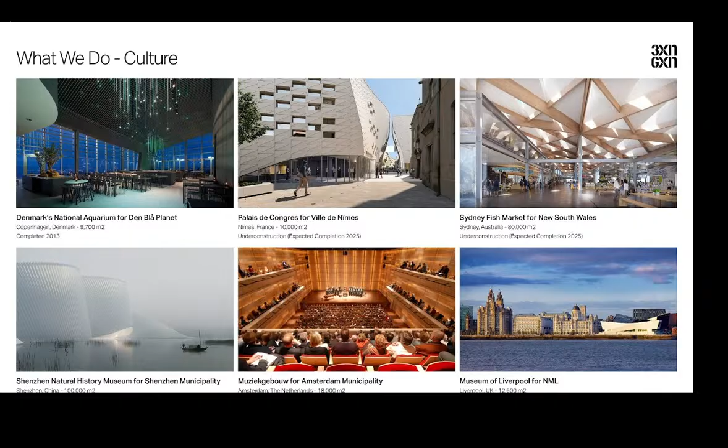We also do more complex work, like children's hospitals, and sports facilities. Is this still muted? Should I go? You're gonna have to, yeah.

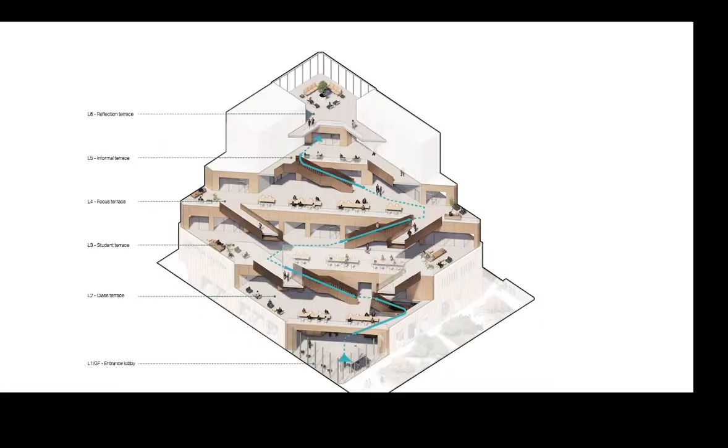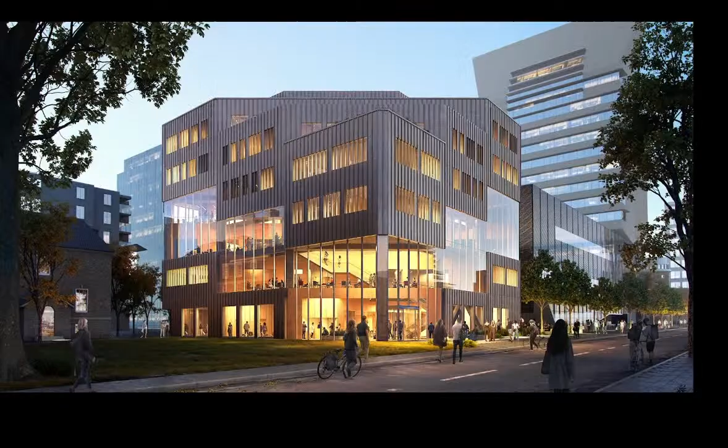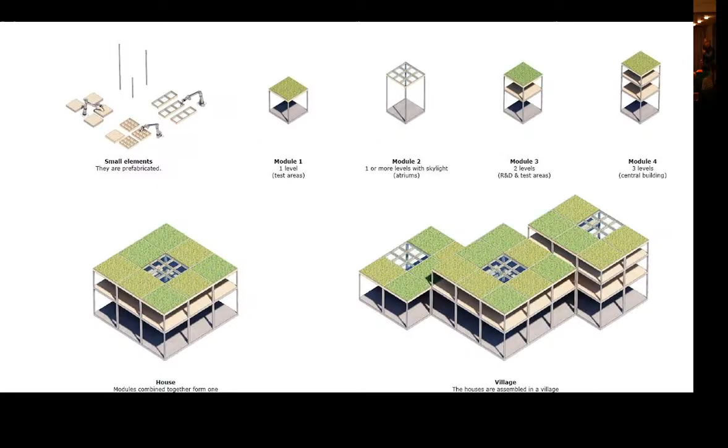The wooden facade gives a very dynamic expression, shaped around a central courtyard, with three light interior atrium spaces. This is a factory and research facility for two robot companies.

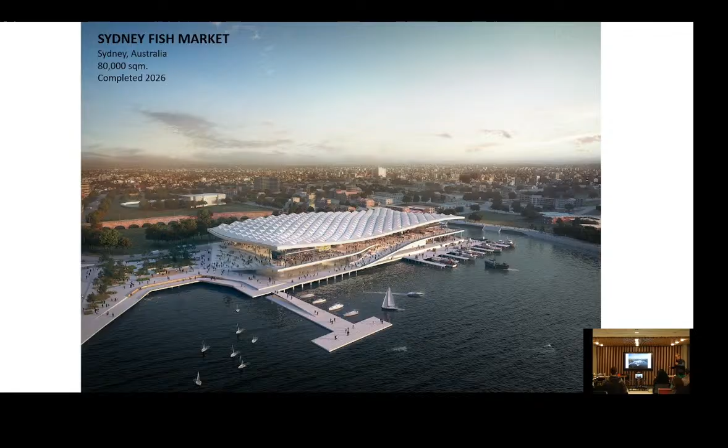More recently, we opened the Sydney Fish Market, with a giant 40,000 square meter roof. This was the rendering from the competition, and this is the final image—I think we got it almost right.

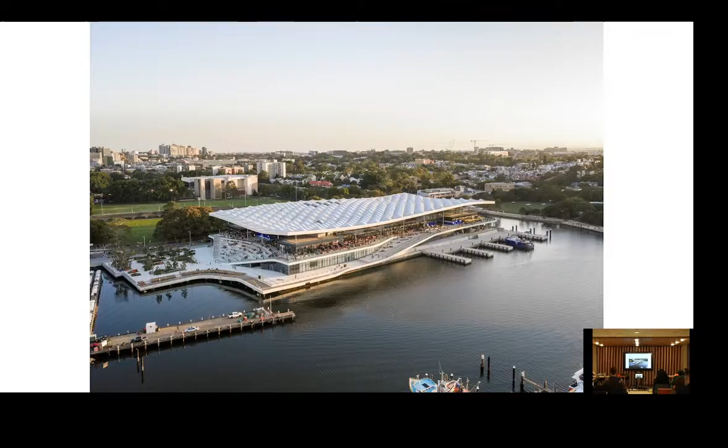It's a large fish market in the Bay of Sydney, consisting of two levels. The whole production, landing, and auction of fish happens on the ground floor, while the first floor is filled with restaurants and kiosks, making it a very public space to visit and enjoy.

Some images show these very public terraces forming a landscape underneath the wooden roof, which sits on steel columns. This is the facade to the street, and the facade towards the water.

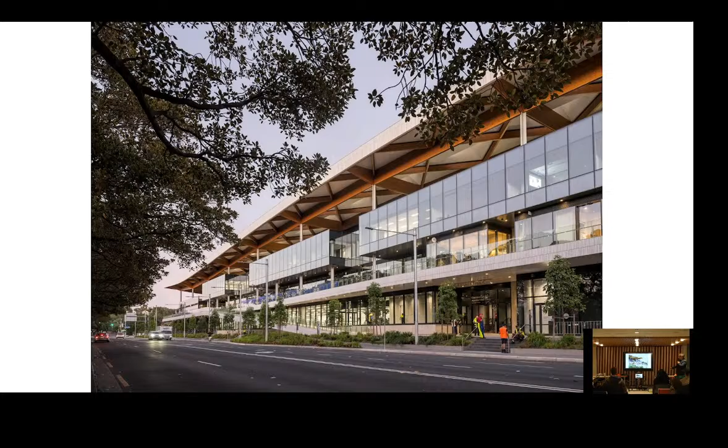The entire roof is a timber structure clad with aluminum panels and white solar panels, PVs on the roof, along with skylights that mediate daylight into the space.

These are views from underneath towards the harbour. You can see the roof consisting of sections shipped to the site and raised up—each has one side with PVs facing the sun, one side with roofing, and one side with a skylight.

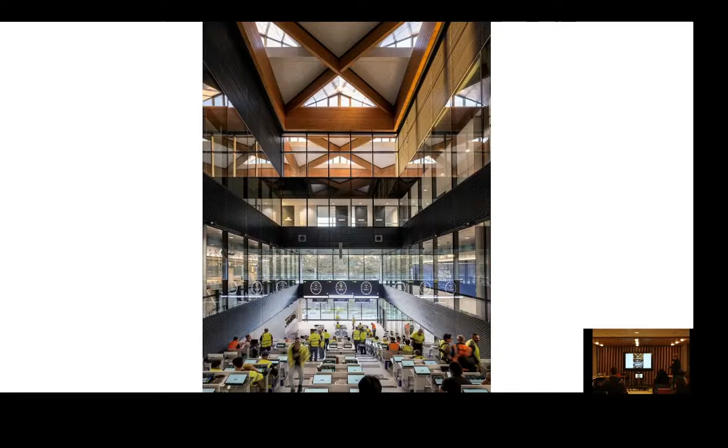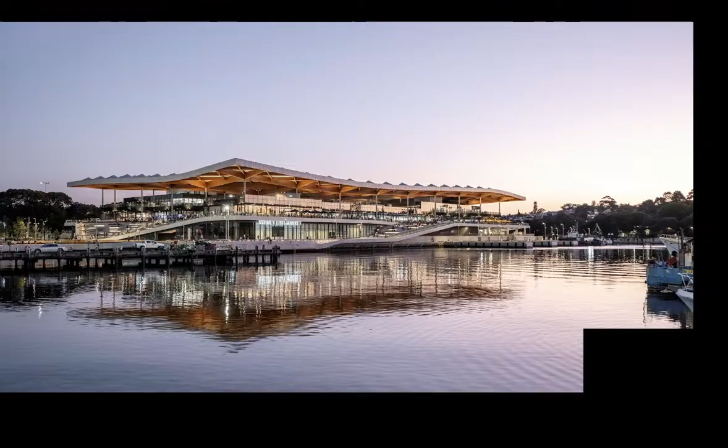Here you see spaces that puncture through the public space—this is an auction hall on the ground floor where fish are landed and auctioned every morning, and most of the ground floor is a very industrial space. Here are a couple of views from there.

It was opened earlier this year, in the beginning of January.

What we're increasingly looking into is how we can use even fewer resources when we build in Europe—this is becoming a real issue in both legislation and elsewhere. Currently, about half of our projects are transformation projects where we use existing buildings as the base.

We kind of live in a building that has been transformed ourselves. This is our office in Copenhagen. It used to be an old shed for repairing boats. We rebuilt that about 10 years ago, and yeah, this is how it looks like.

So obviously the challenge here is that if we keep using material, it's not an infinite resource. The construction sector accounts for about half of the global resource use, and we tend to throw it away when we break buildings apart.

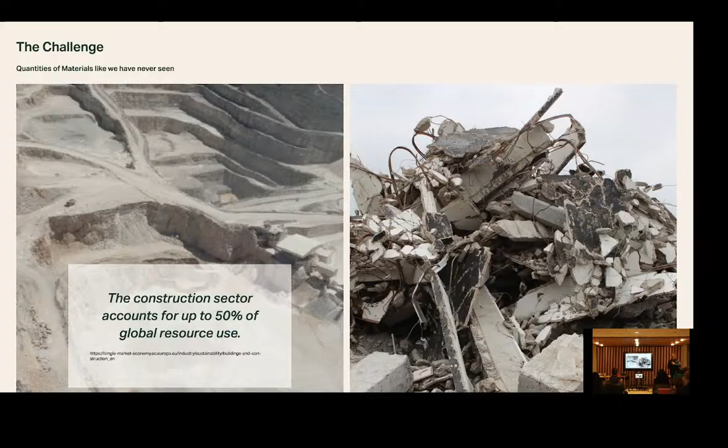All of these numbers obviously need to be taken with a grain of salt, but there are studies that say we approximately have 240 billion square meters of construction in the world today, and prescribed necessary new construction until 2050 is 420 billion square meters, equivalent to adding another Manhattan to the world every month. That's fast.

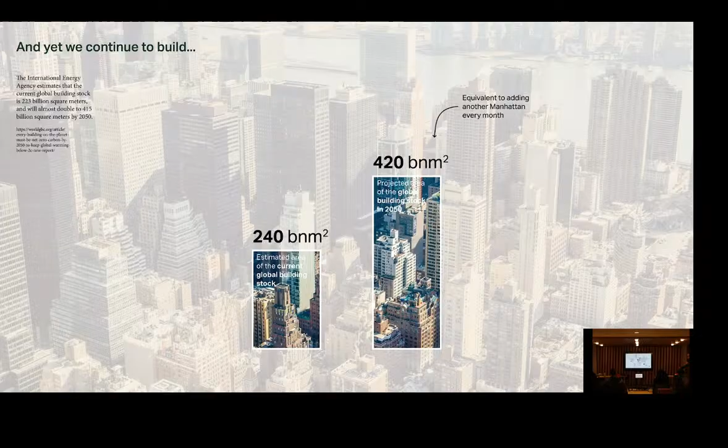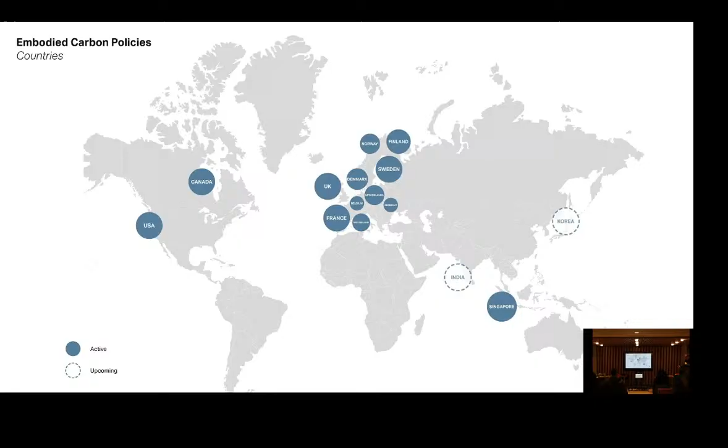So to cope with this, a lot of governments and cities are starting to introduce carbon budgets in legislation. This is a study of a lot of European carbon budgets - Canadian and American also already have carbon budgets. The problem is we're not really comparing apples with pears, so every country is making their own budgets and their own legislation at the moment.

Also, public opinion is valid in this. This is a case from London, where a building was slated for demolition - the Marks and Spencer building. They went through planning, got permission, and got all the way up to basically the demolition company arriving at the building, and then it was rejected by the city. Because of public opinion, it had to go - it had to be transformed and kept.

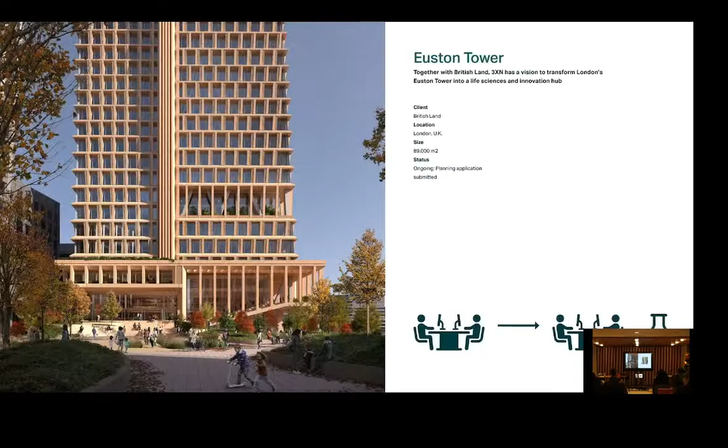So obviously this was a major setback for the developer, and it has really influenced providing these lab-enabled office spaces. Obviously, the facade on a building like this needs to be replaced, so we're keeping the concrete structure.

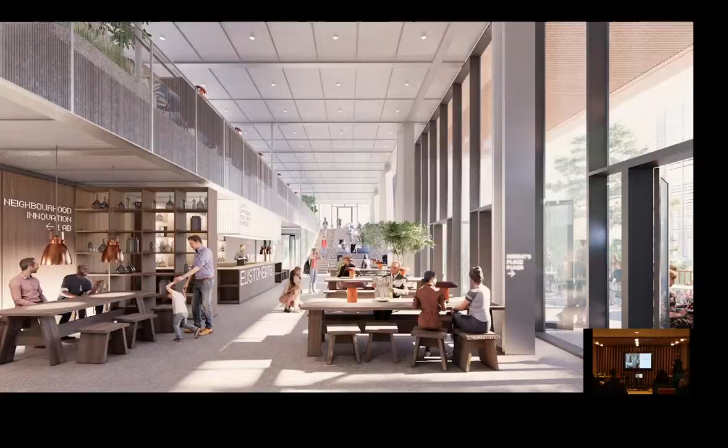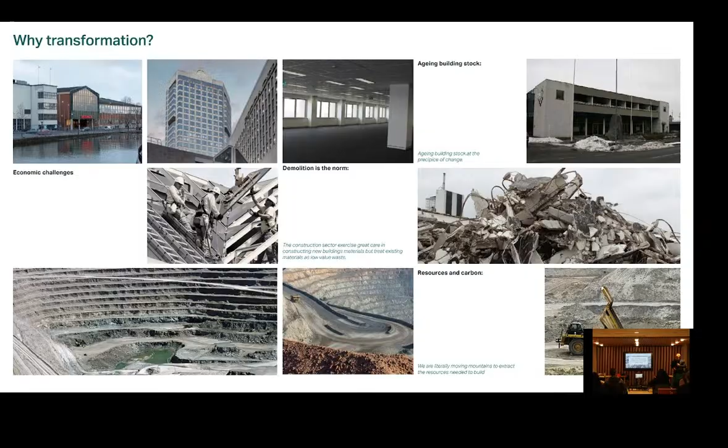Yeah, okay, so basically since the times of COVID, there has been a flight towards quality in office buildings. It's no longer considered appropriate just to have an office space. We see that a lot of office spaces are vacant.

And at the same time, we have an aging building stock. This is the comparison between the US and Denmark. Our buildings last for a little bit more than 60 years on average, and that's not a lot. If you see it in a historical context, from the 1900s, we see that buildings were built to last 200 to 300 years, and this is gradually decreasing until now, where housing structures are built to last about 50 years.

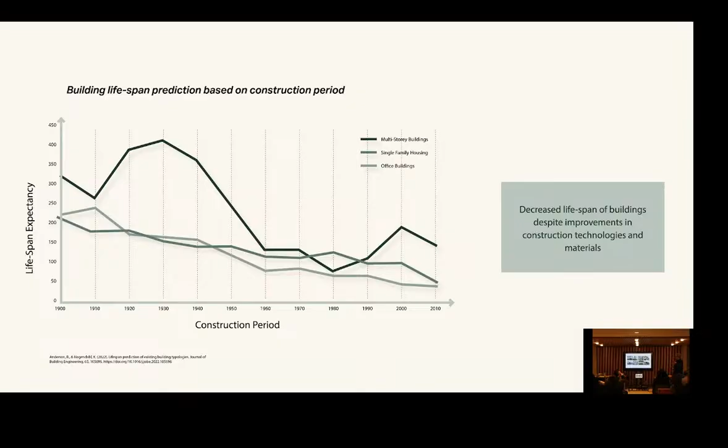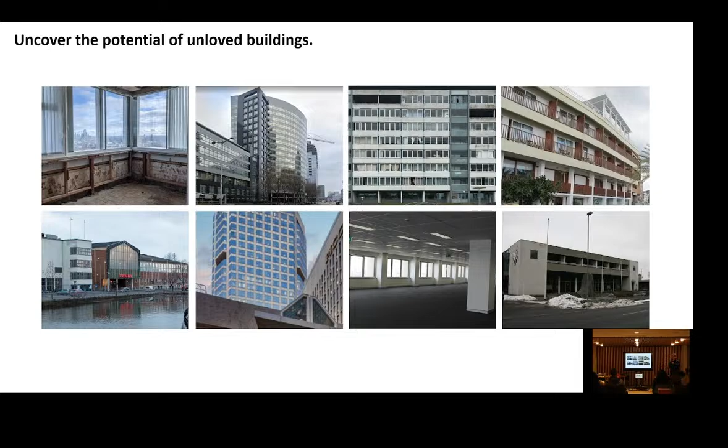So this is where we see the necessity to, let's say, uncover the potential of unloved buildings. In the last 5-8 years, we have been looking at all of these very, very ugly, very rundown, and very sort of not sexy buildings. We have transformed all of them into something that we believe is worth using.

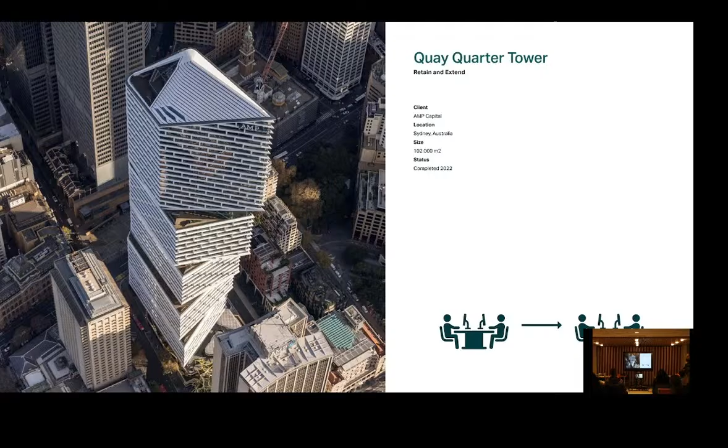The biggest one of them being the Quay Quarter Tower in Sydney. This is a transformation of an existing tower - the Quay Quarter Tower retains 65% of the original tower structure and 98% of the original core. Here you see this was a 1970s building, one of the first high-rises on the Quay Quarter in Sydney, and this is the same view 10 years after, with the restored or re-adapted new tower.

It's located at the harbor, just behind the Opera House, so fantastic views. The idea here was to create a village in the sky - to take these mid-rise blocks and stack them on top of each other, creating not a sort of elegant vertical high-rise, but a stacked high-rise.

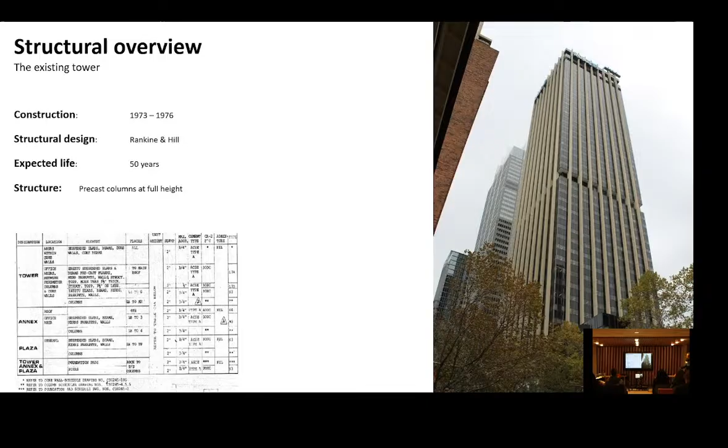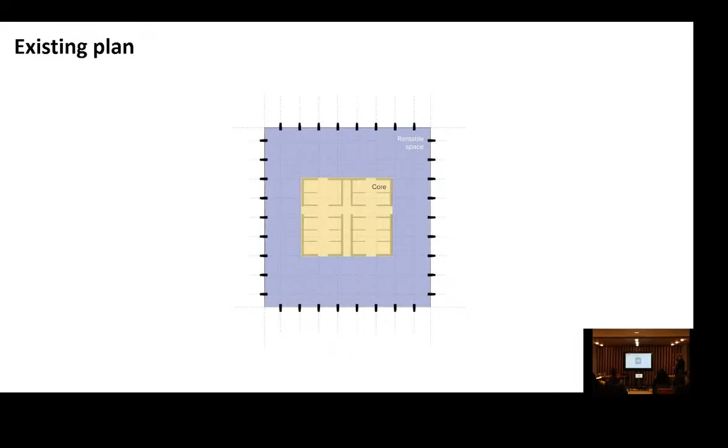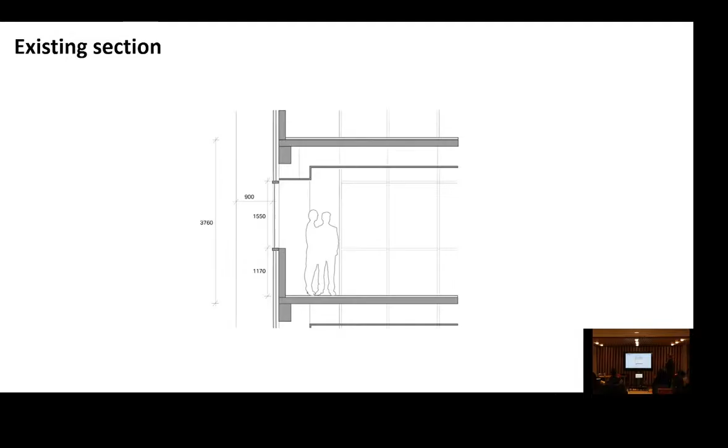So this is the existing building, with an expected lifetime of about 50 years. It had a relatively bad usage ratio between rentable space and core space, a relatively limited way of using it in terms of office layouts, and relatively mediocre interior design. The way it met the street also left a lot to be desired. But it had a decent floor-to-floor height of 3 meters 76, which enabled us to use it for office space, and it had an amazing location with views over the harbor.

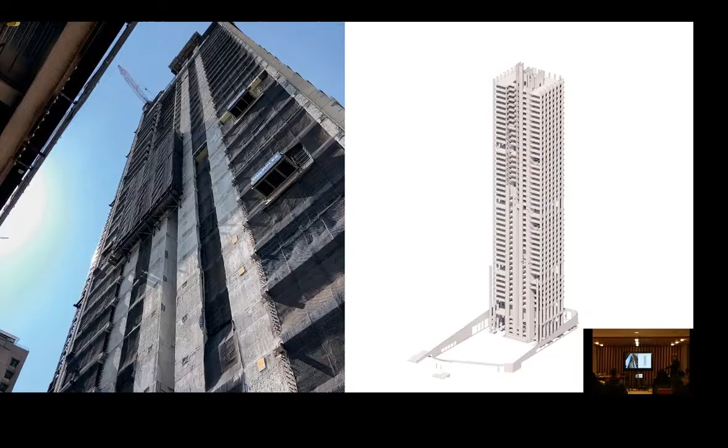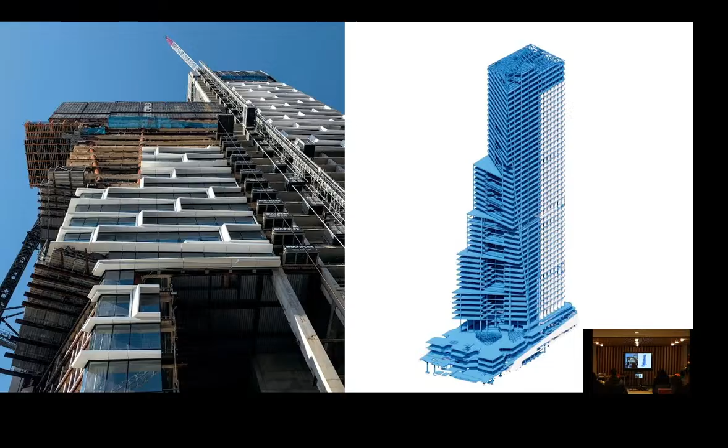So what we did was peel back a quarter of the tower and leave open the original structure. You see the image here on the left, and then we grafted onto that a new tower, adding 50,000 square meters, basically another 100% of the floor plates. You see the process here: the uncovering of the existing tower, the new facade going up, and the new tower going up next to it. The two towers are grafted together, and the facade is connected.

In this short process shown in the movie, it actually took 3 years to build this, but still 1 year faster than if you would have torn down the existing tower and built it from scratch. This saved about 12,000 tons of CO2, and about 100 million Australian dollars in terms of material and time. So this was a big deal, and also quite important proof that we can transform buildings at this scale inside cities at a reasonable cost and a reasonable pace.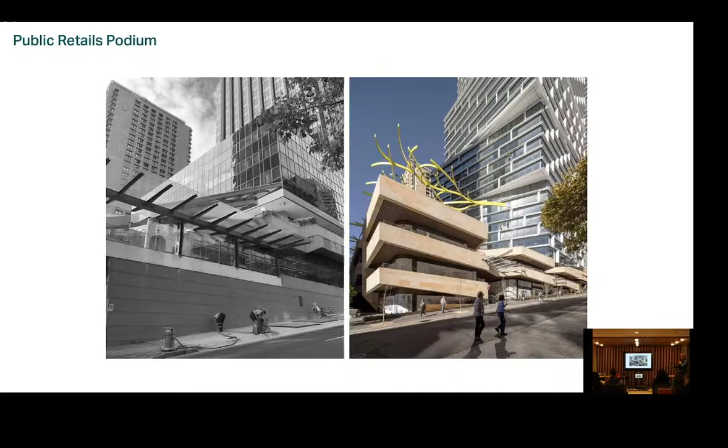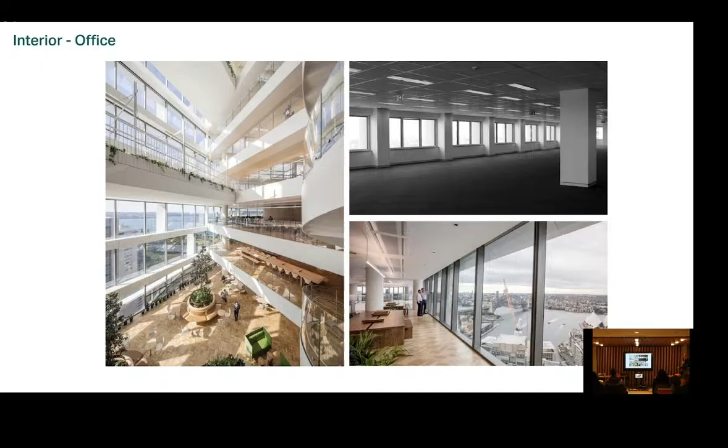So this is just some of the before and after images. Obviously everything we do here, we do to improve the quality of the space and the quality of the urban space around it. So opening up the ground floor, creating entrances where before there was just a wall. Opening up lobby spaces also inside, where before this was just a one-story lobby space with an elevator. Here you see on the top right corner the existing structure, or the existing office spaces, and you see how it's laid out now with floor-to-ceiling windows and big atriums.

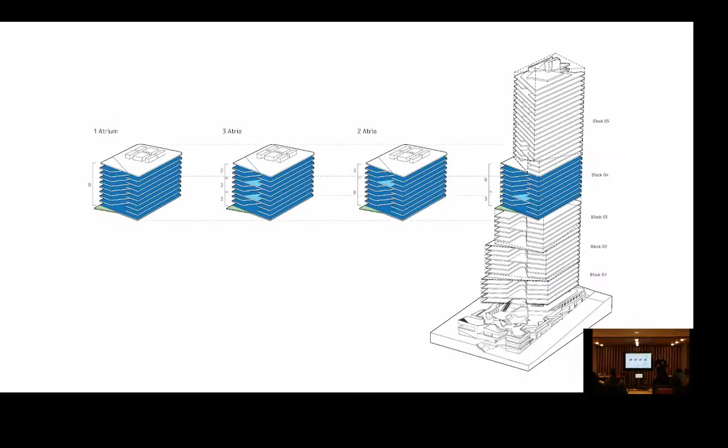So the idea here was that every unit of 9 floors had their own atrium. The base layout connects 9 floors with a large atrium, and then we have the opportunity to add, on every 3rd floor, an additional floor plate with smaller elements. All of this can be added or taken away using the frame lift, without the need for external scaffolding or a crane, keeping the configuration of this high-rise flexible for the future.

So you can have a tenant that needs a large space over 9 floors that wants the place connected, or you can have a tenant that simply wants 1 or 2 floors and closes it off. So this is just the floor plates of this.

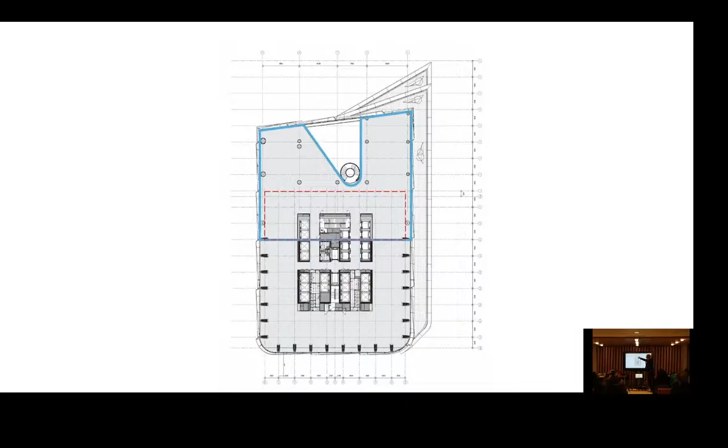You see down here the existing building and the grafted core. So the core is extended, and all of this space here, where you see the atrium located, is basically part of the new building. And this is how an atrium over 9 floors looks, and this is how an atrium in space with the closed roof over 3 floors looks like.

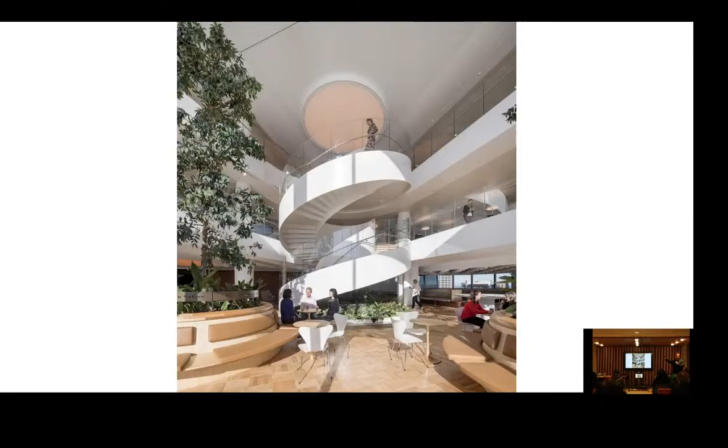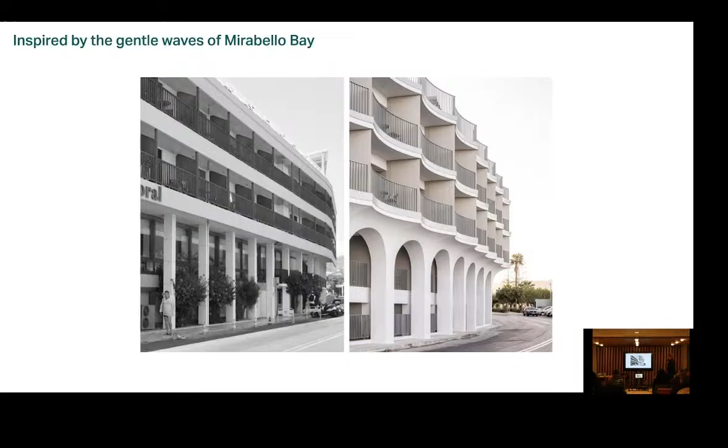Another project that has been transformed recently is the Hotel Coral on the island of Crete, about 8,000 square meters. This was the image we took when we first came there—we saw this rundown hotel on the waterfront—and on the right we have the transformed building.

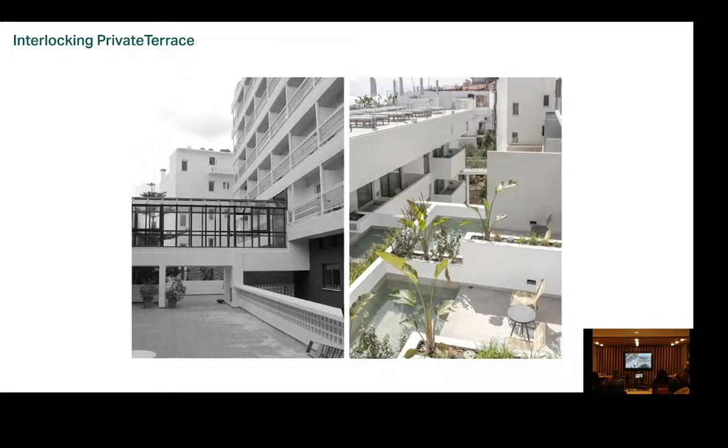So basically, in this case, we didn't do much with the existing structure. We kept all of the existing structure. We added pools on the roofs and cleaned up the rooms. But here you see the rooms haven't changed that much. Where things have really changed is that the activation of every space is much more interesting, and the facade towards the sea is obviously upgraded. A lot of new materials are used to clad the structure, but in essence it's the same structure, the same building, using the same components.

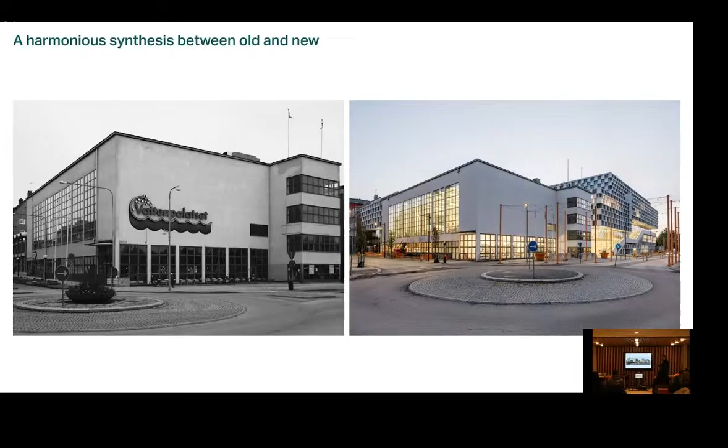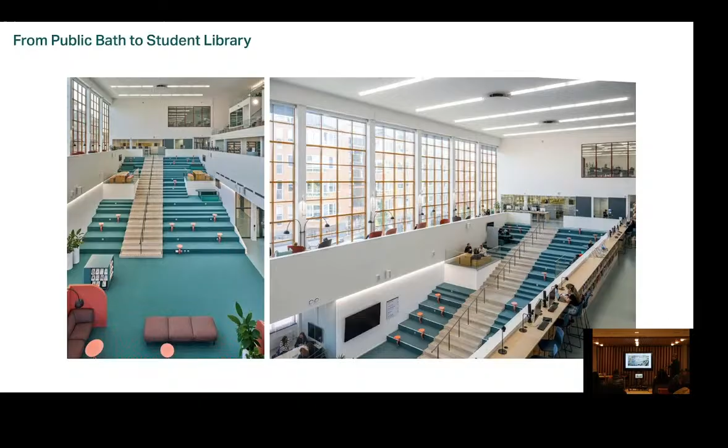Similar to this is a university in Sweden that we opened four years ago. This used to be an old aquatic center on the left side, and on the right side you see it was transformed into this university, adding a new building on the right hand side, and using this old 50-meter pool to become the new entrance through this library. So this is the lobby space of the library, situated in this old 50-meter pool.

Okay, how are we doing on time? Good, pretty good. Yeah, go for it. We can go for this? Yeah.

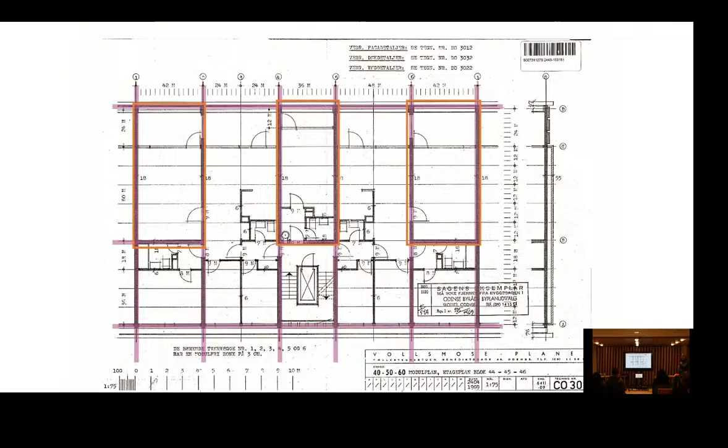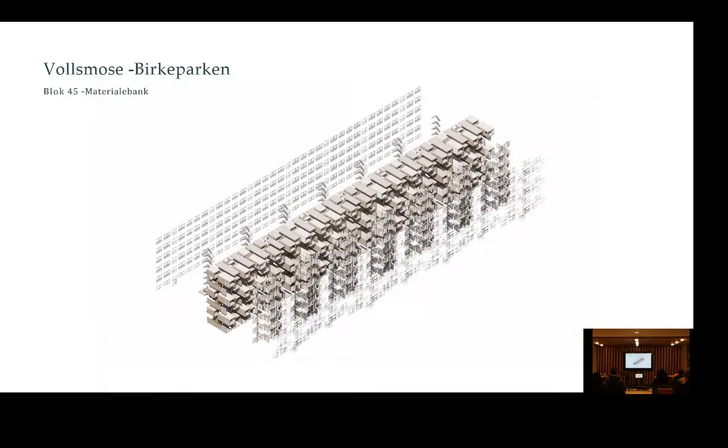They have a very high degree of structural integrity, and a lot of these components are still very valid and usable today. So we did this project together with the industry and with partners, demolition companies, to see if we could use some of the components, the prefab concrete elements, in new structures—removing them from the site and using them in new constructions.

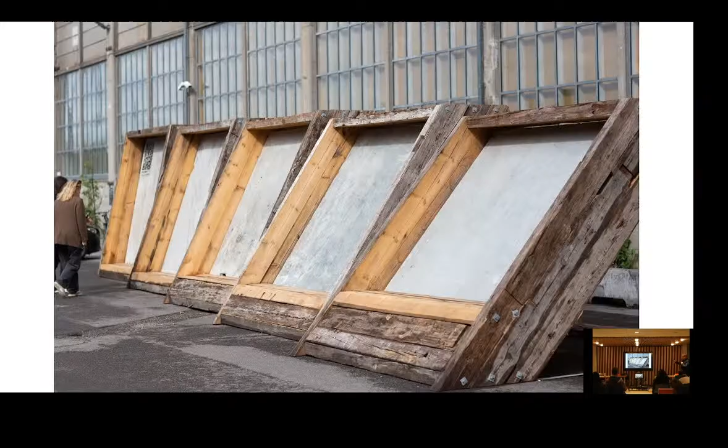Some of the early adaptation was to use it as elements on display, but some of the goal is actually to be able to use it in new residential buildings. So this is the vision of this.

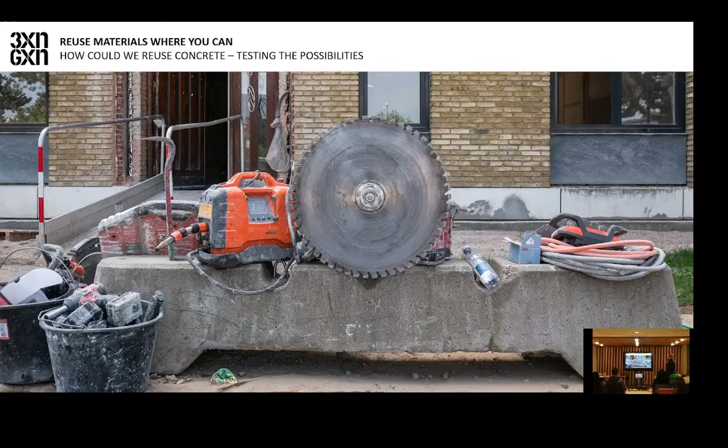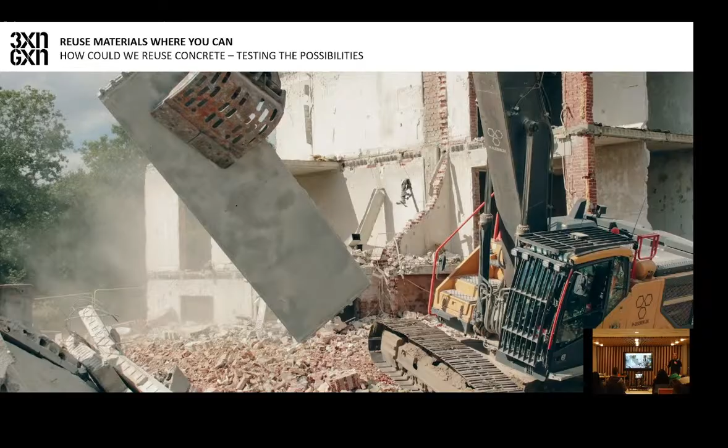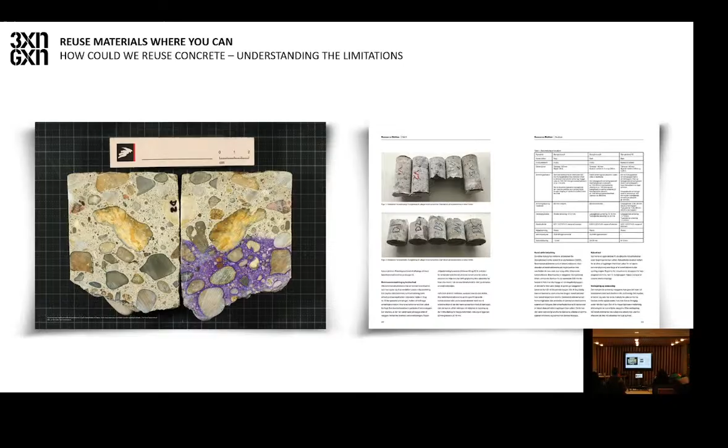And in this we met a lot of practical difficulties. This is how demolition happens today, and we were making rules for the demolition company on how to lift out the concrete elements. We were testing the strength together with universities for the different elements, and we were able to salvage a number of elements to be used in different projects.

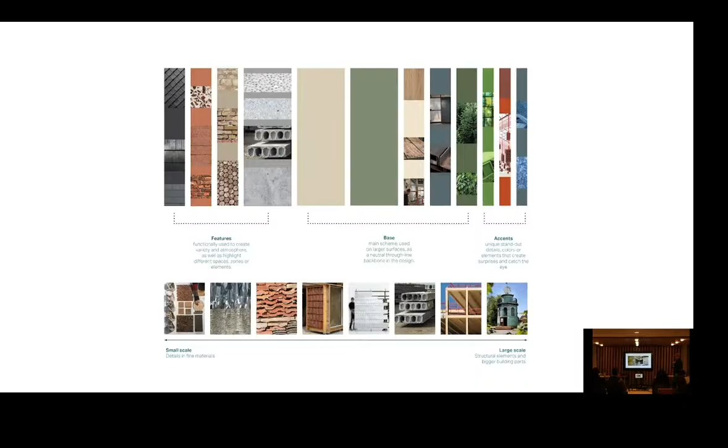So this is one example of that: the headquarters of this demolition company, the Cherning office. This is their hall, where they had their offices and storage, and they wanted to build a new headquarters with the elements they found on building sites. This was really a chance for us to explore if we could put this vision into reality—to create something interesting out of materials salvaged from building sites. So we turned the design process around, using existing material palettes, basically what they found on different sites, and designing with that.

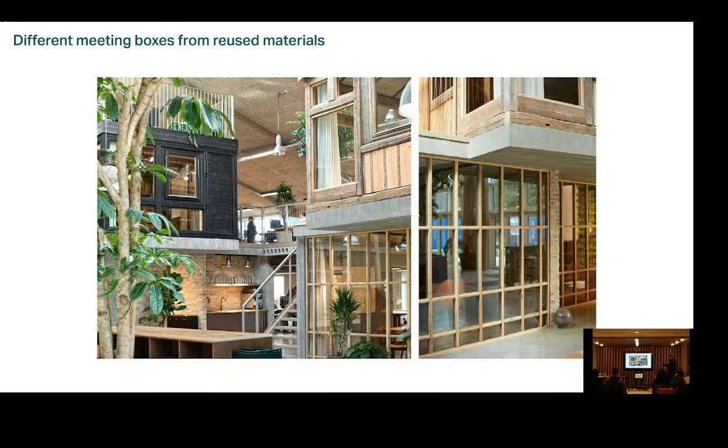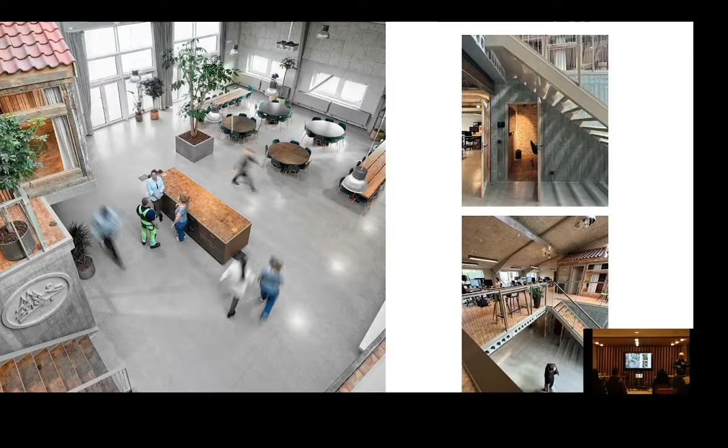That becomes some of the textures and elements you find in the space. This is the meeting rooms put together from different facades, windows and doors, and this is the overview of this space. It actually becomes some kind of collage of different components, but it has its own sort of aesthetic beauty. This is some of the salvaged prefabricated concrete slabs that were used, and these are the roof tiles used for wall claddings, and old wooden walls used also for walls.

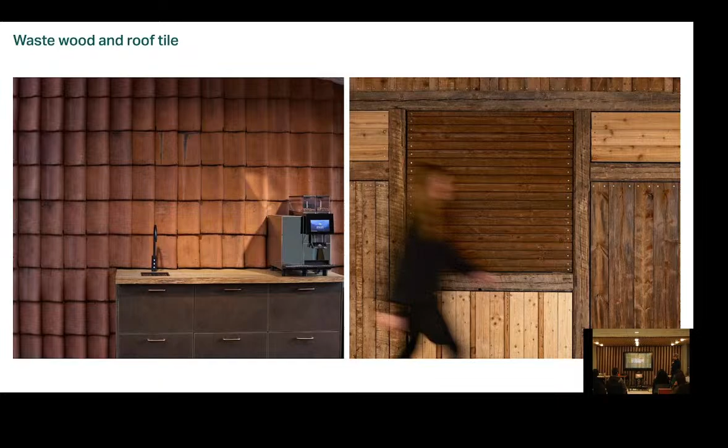So 89% of this building has been done with recycled materials. All of the structural materials are sourced from in-house demolition projects, and the LCA of this is a very, very low 154 CO2 equivalents per square meter. So this could be one way, let's say one extreme, of how to build in the future. But I definitely think it's worth exploring different potentials in terms of using the existing building stock that we already have as a component in future construction.

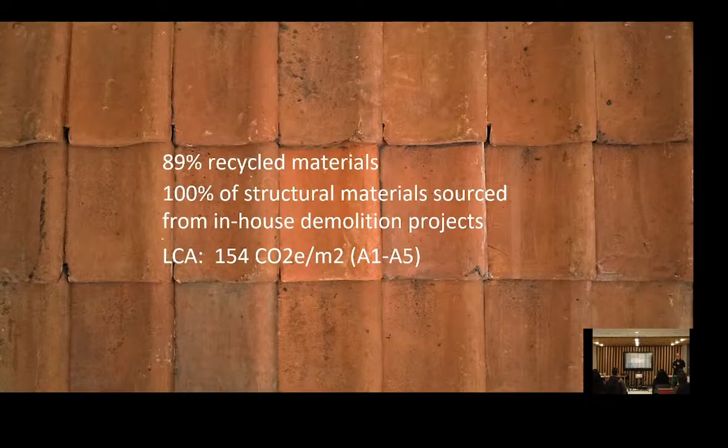Thank you, that's all I have.